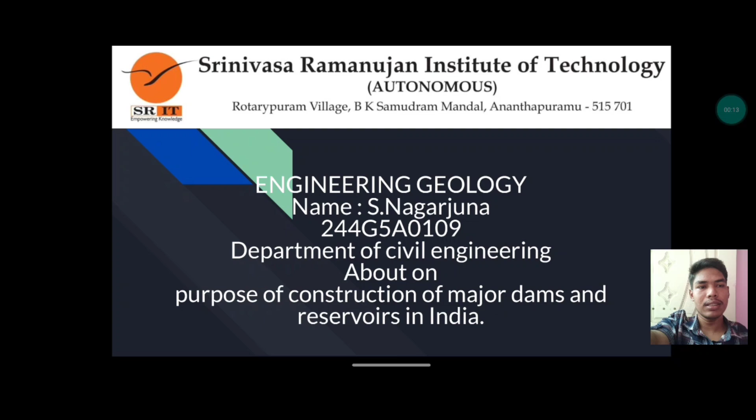Today, my topic presentation is about the purpose of construction of major dams and reservoirs in India. There are four types of dams in India based on purpose. First one is storage dam. Second one is detention dam. Third one is diversion dam. Fourth one is coffer dam.

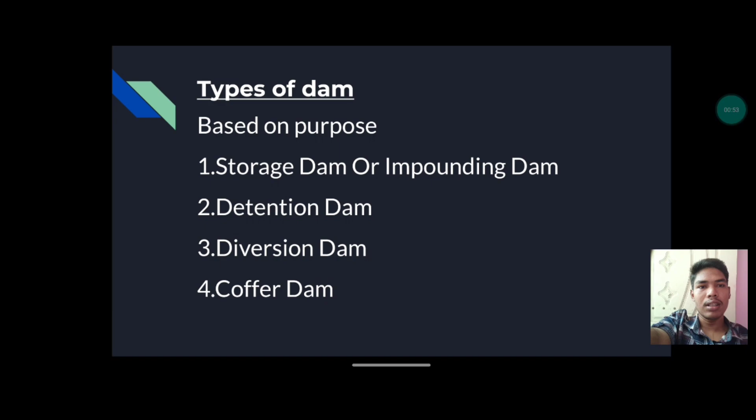Storage dam means where the water is stored for domestic purpose, industrial purpose, and agriculture purpose is called a storage dam. Detention dam. Detention dam is also called one type of storage dam. Diversion dam. Diversion dam means where the water is diverted into small streams or canals for a domestic purpose. Coffer dam.

First one, storage dam or impounding dam. It is constructed to create a reservoir to store water during periods when there is a huge flow in the river in excess of demand, for utilization later during periods of low flow. Water stored in the reservoir is used for irrigation, power generation, water supply, etc.

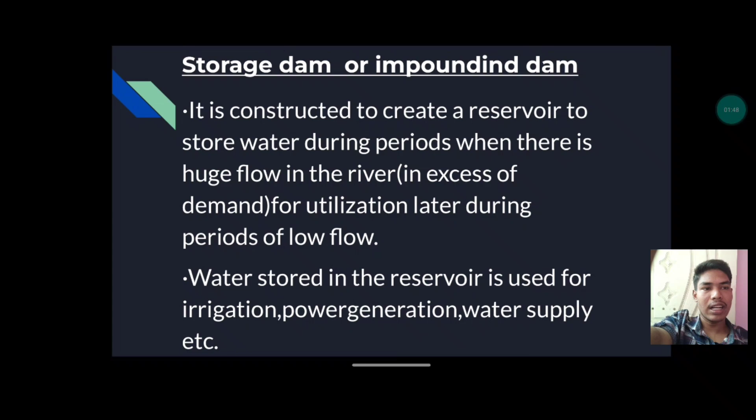Detention dam. Detention dam means it is primarily constructed to temporarily detain all or part of the flood water in a river and to gradually release the stored water later at controlled rates, so that the entire region on the downstream side of the dam is protected from possible damage due to floods, and it can also be used as a storage dam.

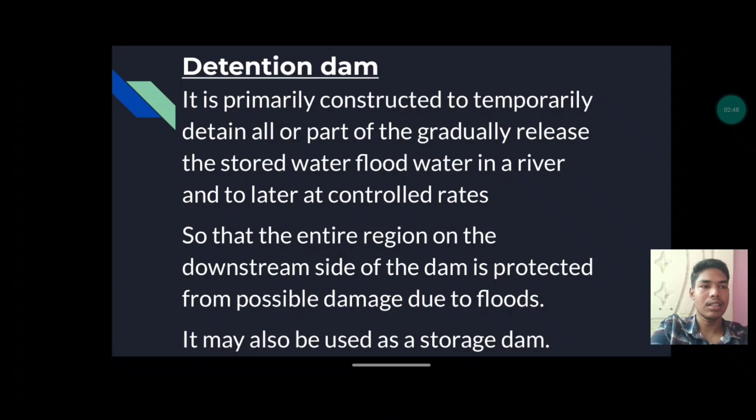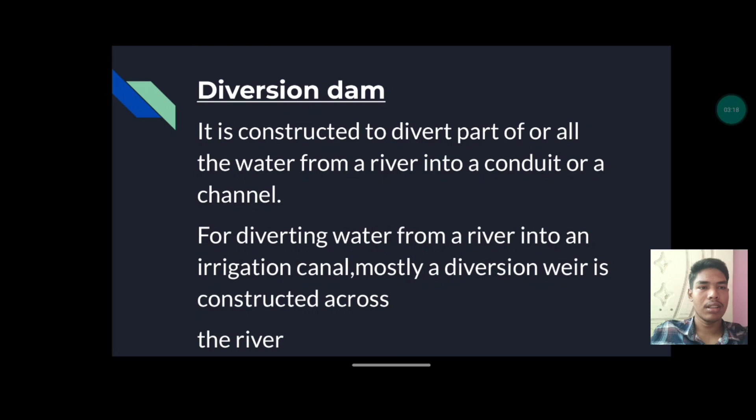Diversion dam. Diversion dam means it is constructed to divert part of or all the water from a river into a conduit or a channel. For diverting water from a river into an irrigation canal, mostly a diversion weir is constructed across the river. Mainly, the diversion dam purpose is to divert the water from the river to the main stream or a main canal for the purpose of irrigation or drinking for human needs.

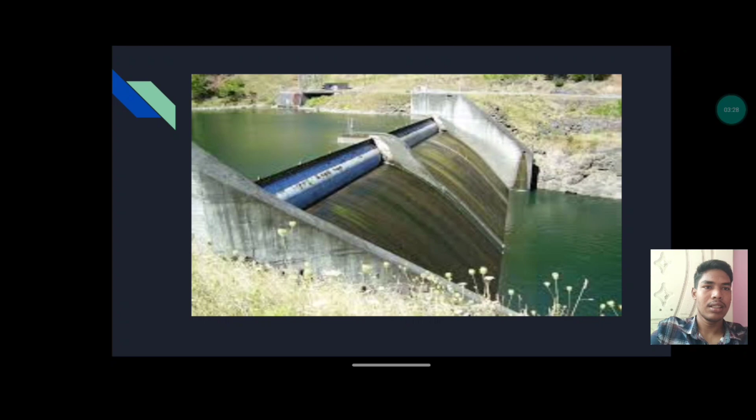This is the picture of the diversion dam. The water is diverting from the main river to the canal. Coffer dam. It is a temporary dam constructed to exclude water from a specific area. It is constructed on the upstream side of the site where the dam is constructed so that the site is dry, behaving like a diversion dam.

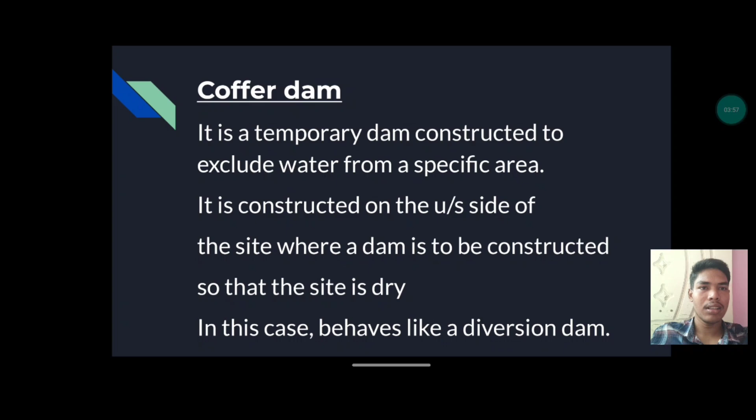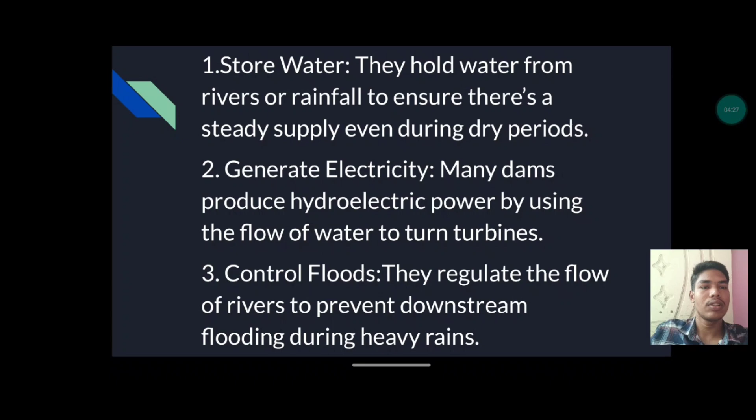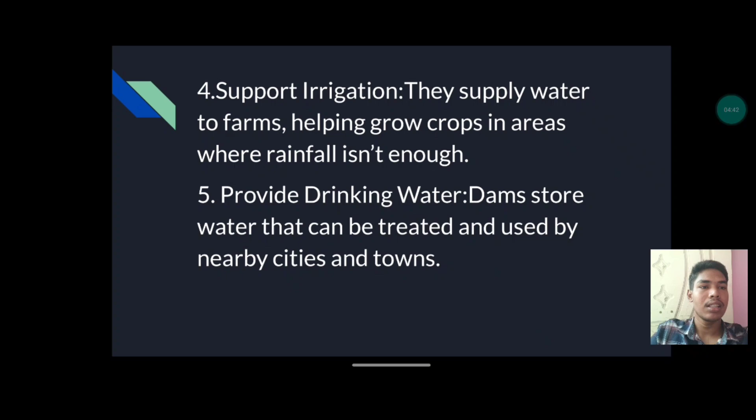Control floods: they regulate the flow of rivers and prevent downstream floods during heavy rains. Support irrigation: they supply water to farms, helping grow crops in areas where rainfall is not enough. Provide drinking water: dams store water that can be treated and used by nearby cities and towns.

Reservoirs. A reservoir usually means an enlarged natural or artificial lake or pond, an impoundment created using a dam to store water. Reservoirs can be created by controlling a stream that drains an existing body of water. They can also be constructed in river valleys using a dam. Reservoir means it is a large structure naturally formed by a lake or stream for storage of water by controlling a stream. This can also be constructed in river valleys using a dam. It is constructed between valleys or hills using a dam.

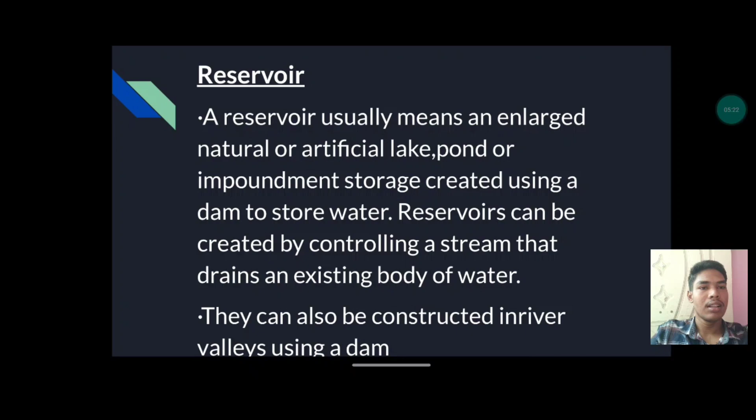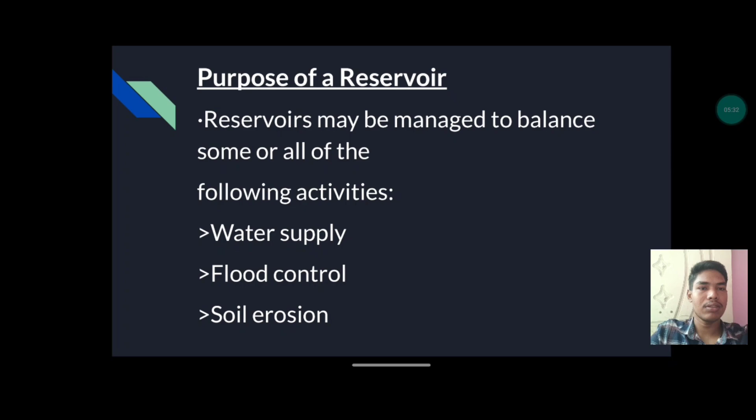Purpose of reservoirs. Reservoirs may be managed to balance some or all of the following activities: water supply, flood control, soil erosion, environmental management, hydroelectric power generation, navigation and irrigation. Considerations for successful reservoirs. From the geological point of view, a reservoir can be claimed to be successful if it is watertight, that is, it does not suffer from any serious leakage of water, and if it has a long life due to a very slow rate of silting in the reservoir basin.

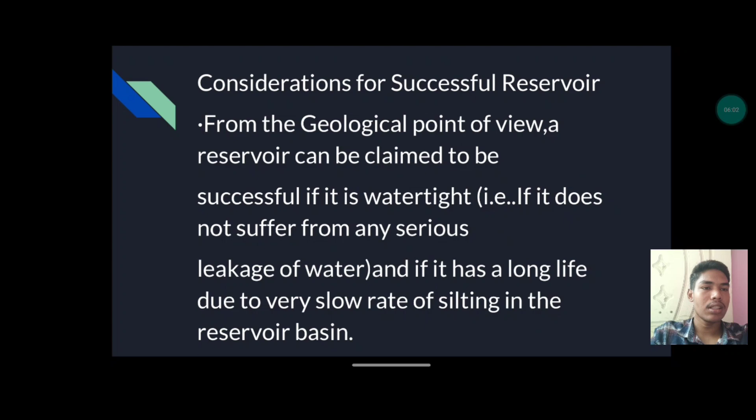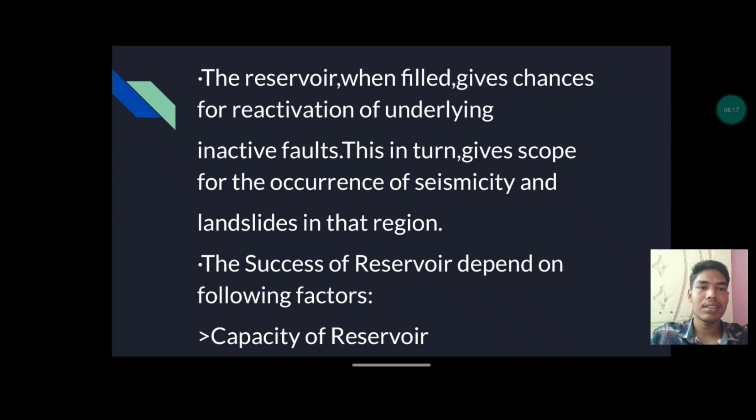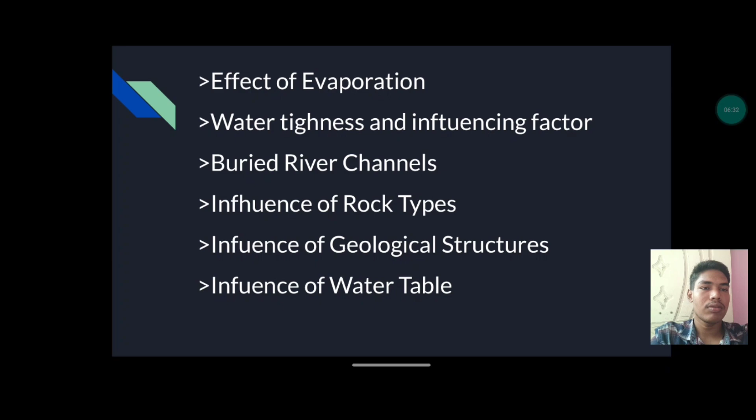The reservoir, when filled, gives chances for reactivation of underlying inactive faults. This in turn gives scope for the occurrence of seismicity and landslides in the region. The success of reservoirs depends on the following factors: capacity of reservoir, effects of evaporation, water tightness and influencing factors, buried river channels, influence of rock types, influence of geological structures, influence of water table.